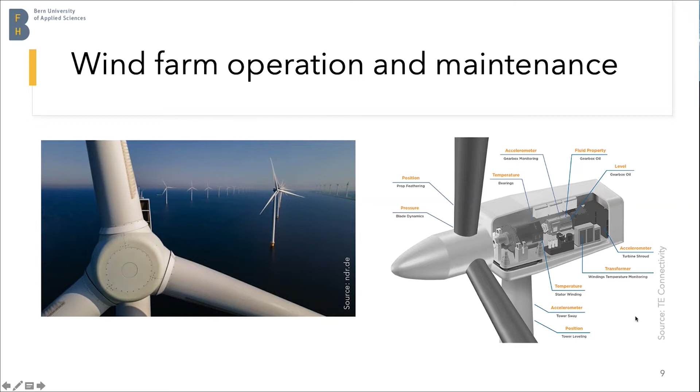Wind turbines are essentially a power plant, and this is nothing you just build and that operates for two years — it's a long process, as we saw on the map, especially the planning stage with all the feasibility studies, which takes quite some time. It's a commitment that costs a lot of money, and then there's the construction, and then from construction to decommissioning.

The lifetime of a turbine is around 25 years, and that's the time period we are interested in, that we want to monitor, and that I'm going to focus on in this presentation.

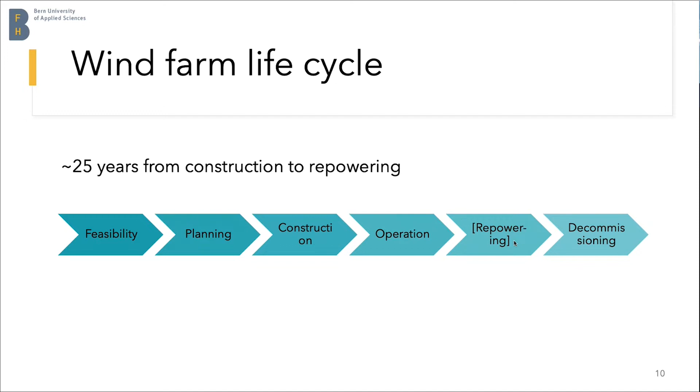So this is an overview of the life cycle cost you need to calculate if you want to build a wind farm. You have different sorts of costs — you need to pay the people who develop and manage the project, and the machines. But once everything is built and sits there, you also need to look into and maintain it, and do repairs and so on.

This operation and maintenance cost can make up to a third of the whole life cycle cost. Offshore wind turbines especially can be quite costly because they operate in very rough conditions in the open sea, and it costs a lot of money to do maintenance work there. So the idea would be that if we can reduce these operation and maintenance costs, we can have electricity that's even less expensive.

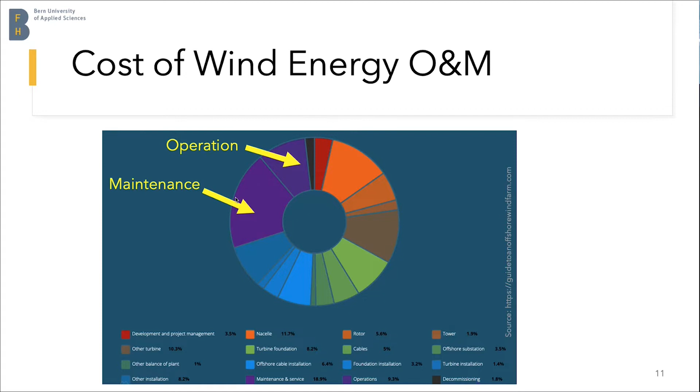So the levelized cost of energy is going to be reduced then. So that's one of the motivations why we look into PHM of wind farms.

Okay, so this is an overview of the different studies. This is one of them, where people looked into the known issues from different wind farms and different vendors. So you can see on the left-hand side the annual failure rate - how often do we see a failure in a certain subsystem. And then on the right-hand side, you see the associated downtime per failure.

So we can see that we have relatively high failure rates, for instance, in the electrical system. But when it comes to downtimes, which is probably more interesting to operators because that reduces the power they generate and directly affects their revenue and return on investment, these downtimes per failure are quite relevant. And you can see that drivetrain, gearbox, and generator components can lead to particularly long downtimes because they are difficult to replace.

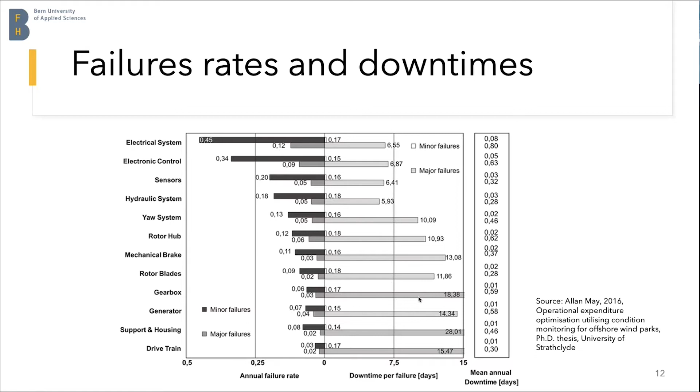So this is just an overview of different maintenance strategies, which probably in this seminar I don't need to explain so much in detail. We know that there are different perspectives or strategies when it comes to maintenance, not just in wind farms. There's the idea of scheduled maintenance - this is, in my experience having worked in industry for some years, what we still find in many, if not most, industries.

You have scheduled maintenance - for instance, you buy some sort of equipment, and you also have a service contract, and someone comes by and checks in every 2 years or 1 year. Then you have regular costs which you can plan, and you don't look into the actual condition of your engine. That's kind of like scheduled maintenance.

And then what's actually happening also in industry is condition-based maintenance - that's what we look into here in the wind turbines. We want to know 24/7 how our engine is doing, how our system is doing, what does it do. Do we need to refill the oil? Do we need to go perform any inspection, for instance? So that's the idea of condition-based maintenance - 24/7 monitoring.

I'll give you an overview of some machine learning approaches that we can use to automate this a bit more. And then there's this holy grail idea of predictive maintenance, which, in my professional experience, isn't present in industry so often yet. The idea would be that we do condition-based maintenance, but on top of that, we're able to estimate how long a certain subsystem or the whole system will live, or until maintenance is needed. This is something we see maybe more and more in batteries, but not so much yet in wind turbines in industry.

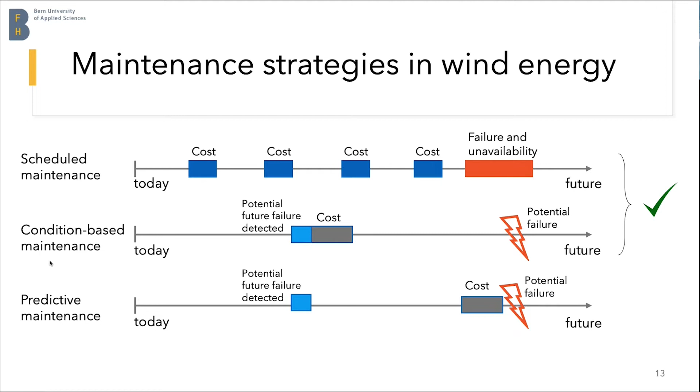Okay, good. So let's look a bit more into the different systems - I spoke briefly about this already. We have different subsystems: there's the rotor, and the blades - the blades pitch, so the position of the blades is controlled towards the wind in order to regulate the speed of the turbine. So we have a pitch system and associated monitoring of the blades and the pitch system. Then we have the drivetrain.

So we want to monitor the vibrations - accelerometers are quite important for the gearbox, but we also want to monitor, for instance, oil properties in gearbox oil. And then there's the electrical system in the generator, where we look into temperature monitoring, and discharge monitoring is also quite important there. It depends also on the type of wind turbine - whether you have one with or without a gearbox - so there are different types of generators, and associated different types of monitoring come with it.

Okay, and then on top of that, or in addition to that, we also have the data from the control systems, SCADA data - SCADA is supervisory control and data acquisition system.

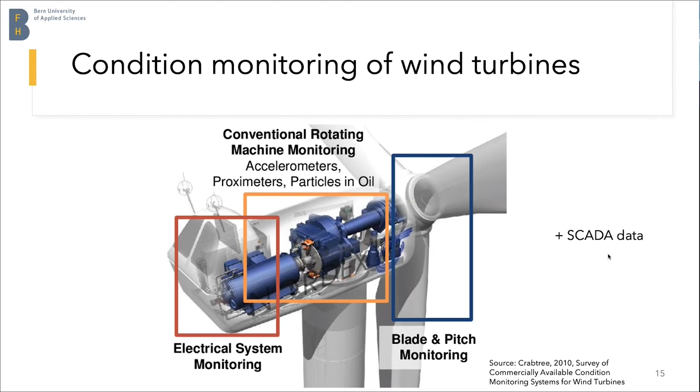Here's another list of what we have available. Like I mentioned, we have monitoring of all different aspects. We can even monitor, for instance, the motion of the tower to infer something about the structural integrity of the tower. So there are also vibration monitoring systems for towers, for instance, which is not listed here, but I have listed it here as well.

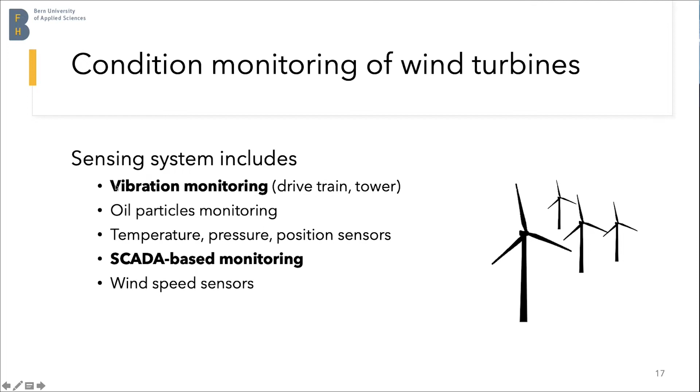In this presentation, I'm going to give some examples of vibration monitoring. I will introduce how we propose to use convolutional autoencoders to kind of monitor the normal behavior and then detect deviations based on vibration responses from components. I'm going to go into this in a couple of slides, and then also give you an overview of SCADA-based monitoring.

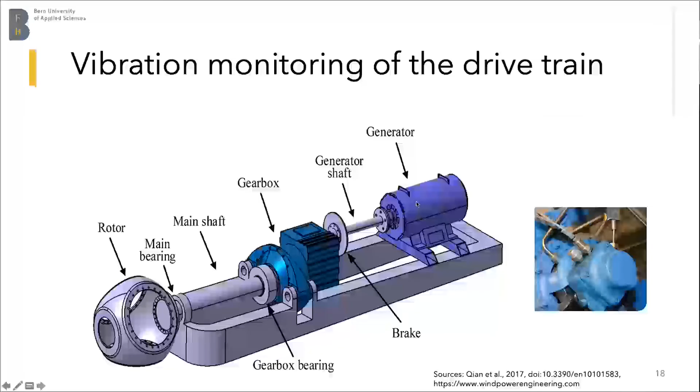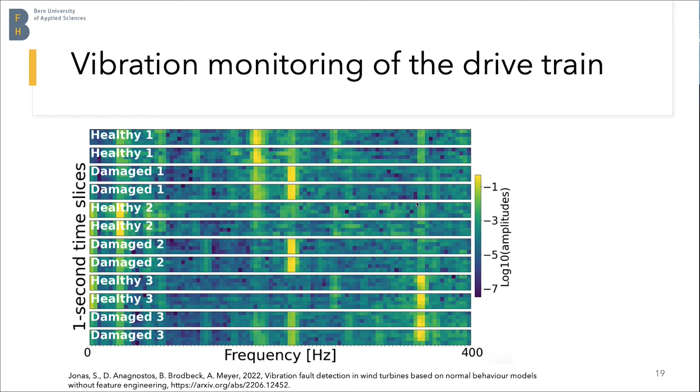Vibration monitoring of the drivetrain is one topic, but I'll go into this in more detail. So I'll jump over this slide, coming to this in a few minutes.

Then SCADA-based monitoring, how does that work? Well, as I said, the SCADA data comes from the control system of the turbine. The turbine is automatically controlled, and that system requires data about the angles, for instance, of the blades and the temperature of different components. So you have this data more or less available anyways, and you can make use of it. It comes at regular intervals every 10 minutes, and that's quite convenient to use if you want to do normal behavior modeling of wind turbines.

So what does that look like, to give you an idea of this data? SCADA data, which I'm going to speak about now, comes every 10 minutes. These would be average values, and you often also get a little bit of statistics around this: mean, then maximum, minimum, some standard deviation, over 10 minutes. You get this data as time series of several hundreds, if you want, probably even thousands of variables, depends on the manufacturer.

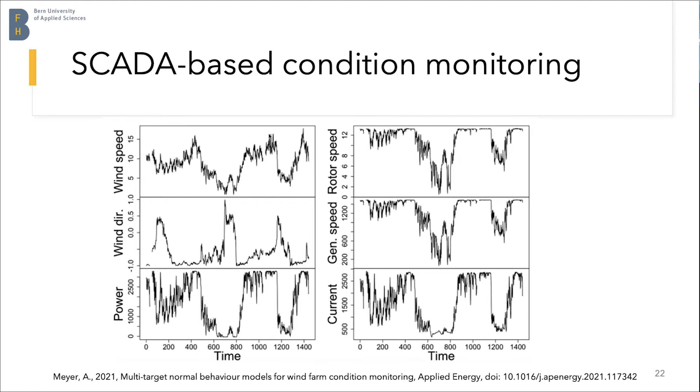Okay, so now let's give you a bit of an overview of how we can use this to construct machine learning models. This is basically regression models. You have input variables that need to be defined by you, usually variables that drive the whole process. In particular, wind speed is a good candidate if you want to model the power production of the turbine, but it depends on what you want to look into.

Variables that are also quite popular for normal condition monitoring - popular target variables would be temperatures. We want to monitor temperatures of different components, like the gearbox bearing, and all the different components where we really want to know what is the current temperature and whether that's in the range we'd expect depending on the current and past wind speeds.

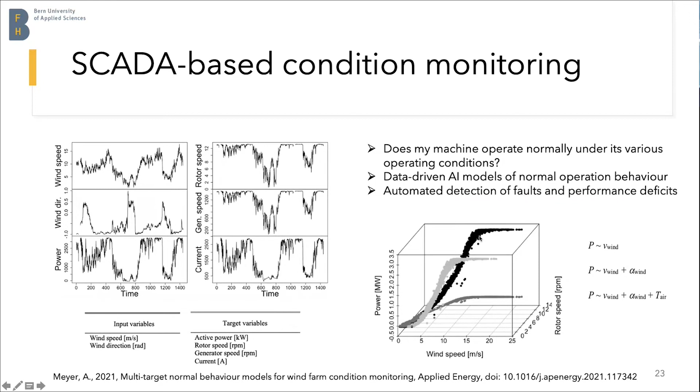Using this model, you know where you should be in your vector space, and if you're quite far away from that location, you get an idea that probably something is not as it should be. It's kind of an anomaly detection approach, because as in many industries, we don't have labels, or very rarely do. So this is mostly an unsupervised approach.

This is an example where it's in a product, like a software you can subscribe to as a service, and it's in operation, where these models have been effective in detecting maintenance needs.

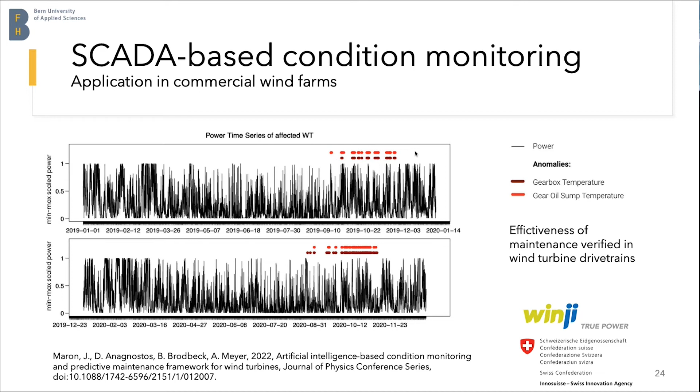Good, so let's go a bit more into challenges and opportunities. I hope I gave you a short introduction into what, from my experience, is the most popular in-practice approach to data-driven condition monitoring and fault detection. But now let's take a wider view on the question of what are challenges and opportunities in prognostic and health management of wind farms.

If we don't just think about the machine learning models, but also about the practical maintenance, then we will very quickly see that there are quite substantial challenges.

What's quite obvious is that the best locations—subtracting all the locations that are out of question because of environmental factors, ship routes, and so on—the most suitable ones were taken first: the ones in shallower waters and closer to the shore. Lots of wind farms are not so far from shore and at shallower water depths. Now the newer, future farms go into other positions, meaning they are further and further away from the shore.

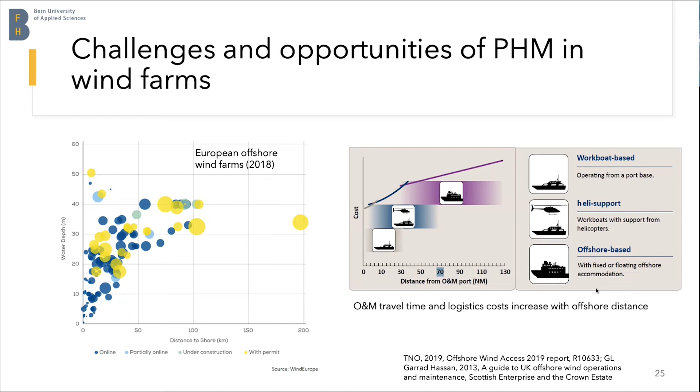Okay, then other challenges, like data, machine learning related, but also other non-machine learning related, just in more or less random order. So for the machine learning models, the big challenge, as in other industries, is to generalize those models across turbine types.

Another kind of challenge, or reality we face, is that as in most industries, we have basically no labels, no ground truth. We have the SCADA data, we have the sensor data, but then how to interpret that data — we sometimes have maintenance logs, log files, sometimes we get information by speaking with the operators, but generally we have no clean, nicely labeled data sets.

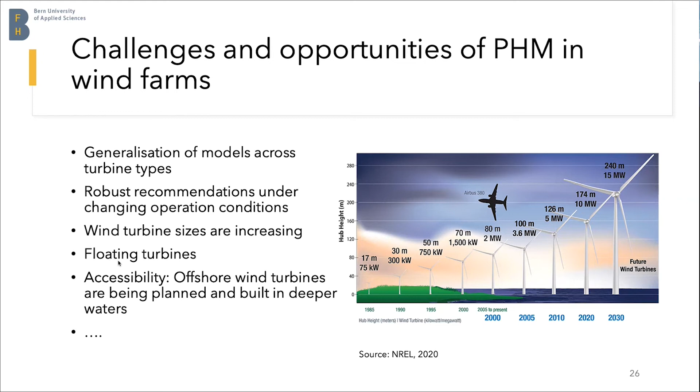Then we have also floating turbines. I'm not sure, maybe this is something new for you — offshore turbines are not just on fixed steel and concrete constructions, like fixed monopiles or tripods, but there are also floating turbines. So these also require their own maintenance concepts.

Okay, then other challenges we have: cost of data acquisition, storage, and computing time. That becomes relevant because, as I mentioned, we can have gigabytes of data from such turbines, especially if we look into accelerometer data, where we have kilohertz sampling rates, and we really need to decide how much and which parts of this data to keep and which not to keep.

Lack of sensor data for training supervised models — I mentioned this already. Related with this whole aspect is we have few fault observations. We have a diverse range of fault types, and a diverse range of models, manufacturers, and so on.

Sorry, there's a noise. Is there a question from someone? No?

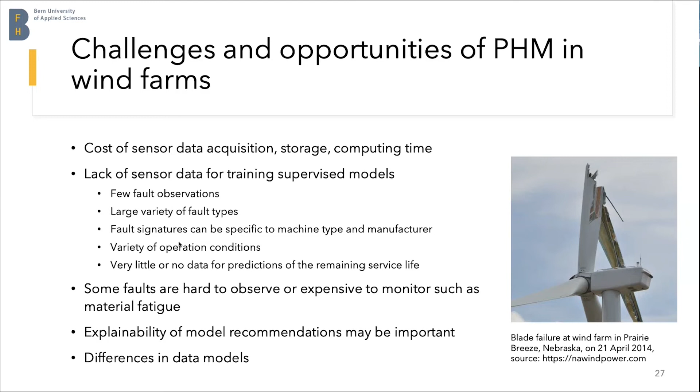Okay, good. So maybe I'll try and speed up a little bit because I also want to speak more about the research we have done — more on the opportunity side. I spoke a bit to give you an idea of what challenges there are, but then there are also, I think, quite some opportunities, apart from the fact that this is overall a very exciting research area.

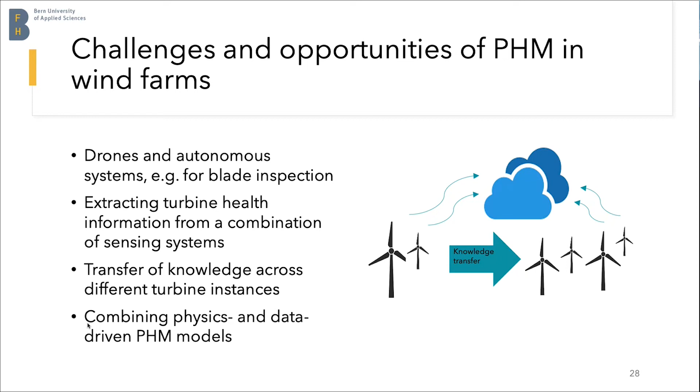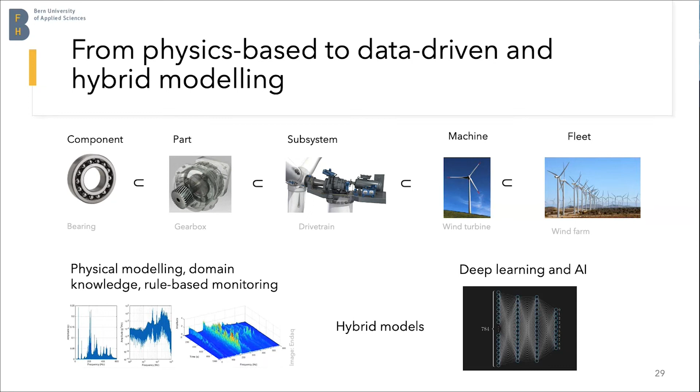Now, the next couple of slides are going to look into normal behavior models more in detail, some research that we did there. And then I'm also giving a little introduction in how we use the convolutional autoencoders. So for the rest of the talk, for the next 10, 15 minutes or so, I'm going to present some results that we have been doing in this field.

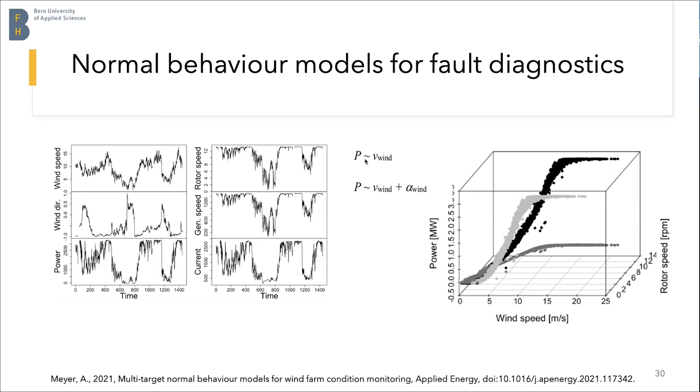So we looked into this already. Normal behavior models can be used for diagnostics, right? I presented this SCADA data to you. I also explained that you can come up with what is essentially a regression model that you can fit with an algorithm of your choice, such as a neural network. And then you have a target variable, usually one target variable, and that is the one you want to monitor. For instance, if it's the power, then you might be interested in detecting underperformance of your turbine with such a model.

And then with these variables, you can come up with what is called the normal behavior model. You model the expected behavior as you have seen it in the same or other turbines, healthy turbines in the past, under similar operating conditions. Then you can basically determine what behavior you should see, the expected behavior based on your model, given the current condition - current wind speed, current air density, air temperature - which are important also if you want to have a power production model, for instance.

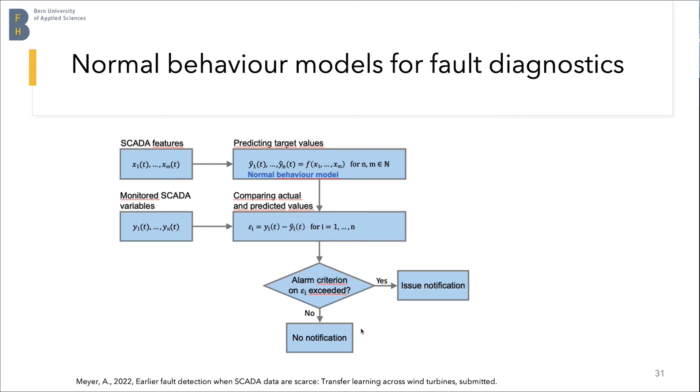Another question is, that's all we have, we have the SCADA data. What do we do with it? We have no additional information, we don't know what exactly happened. But what we can do is look at other variables, and we did this.

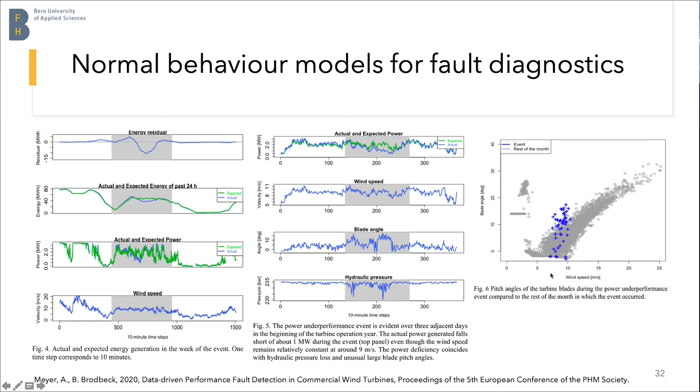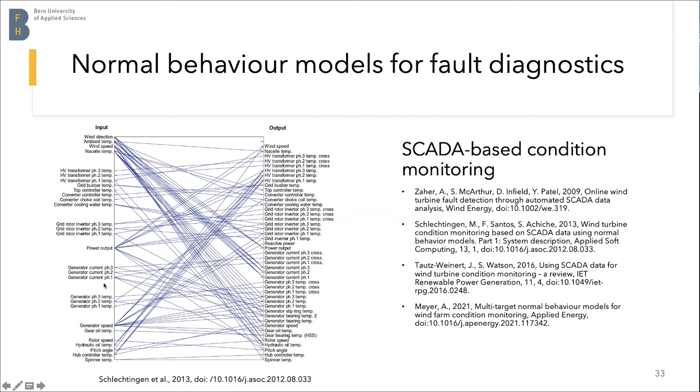Because looking at this, what is in place with many operators is lots and lots of them, hundreds and thousands of single target models. You always have a model like, I want to model power, and I do this with these input variables. I want to model the hydraulic pressure, and I do this with these inputs. I want the rotor speed, so you have lots of single target models.

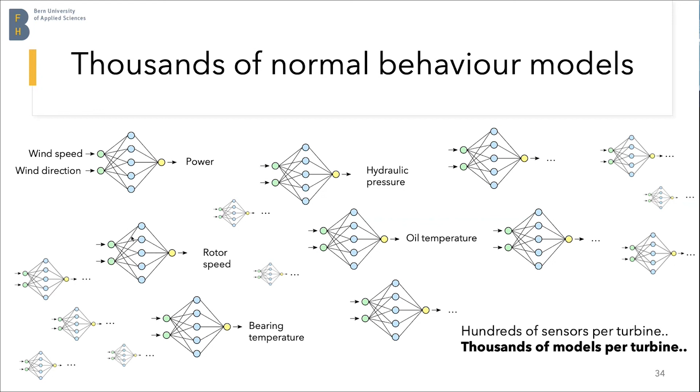So what I looked into last year was, why not have less of these models and just do multi-target models? Wouldn't we even be able to gain an increase in accuracy from the fact that these models could actually learn how the different target variables are related to each other? That was the study that is plotted here.

I showed in this study that, at least for the example I looked into, the multi-target models can obtain the same accuracy as the single target models, but you reduce the number of models, which is quite nice. And in some cases, I could even show that you get a higher accuracy.

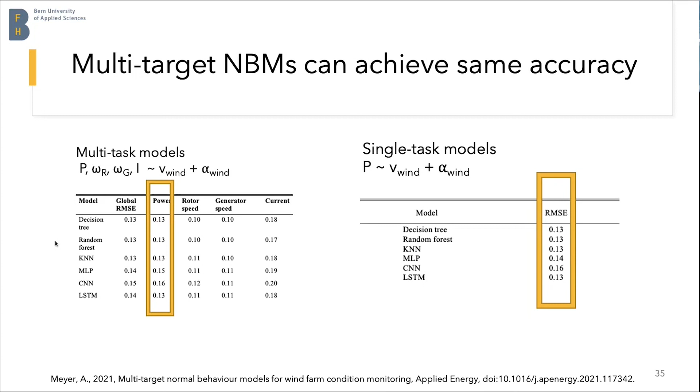Higher accuracy of such a normal behavior model is quite important, because the more accurate the model is, the clearer you will see deviations, the earlier you'll be able to trigger an alarm with your notification system. So the more sensitive you are to unusual situations, the earlier you'll be informed and able to perform or plan maintenance. So accuracy of normal behavior models is important.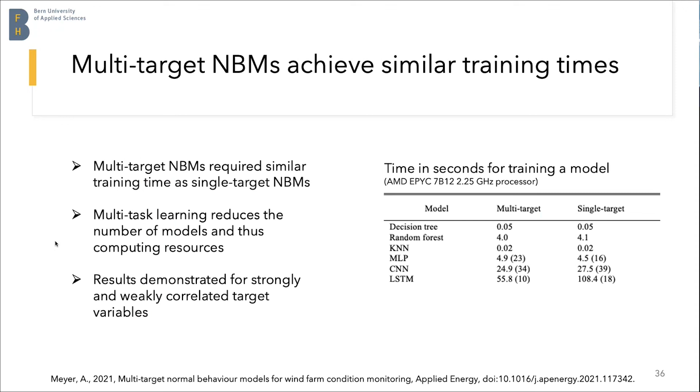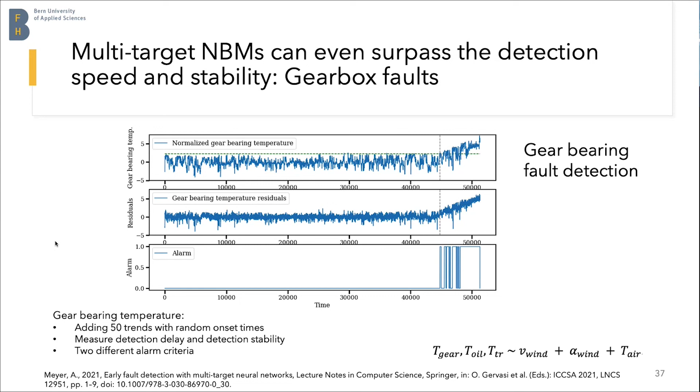This shows that in the cases we looked into, they have comparable training times. The multi-target models were not extraordinarily more expensive. And then this is a study, I won't go into detail because of time, where I showed that you can even get more accurate results with multi-target models, and you can see occurring faults earlier, which is quite relevant in practice.

Good, let's go to the next one. This is vibration monitoring, which I mentioned already, a study we did recently with two data sets: one from an operational commercial wind farm, and one from NREL, the National Renewable Energy Laboratory, an applied research organization in the US. So one was from a commercial wind farm, and the other from test bench measurements of two quite large wind turbines.

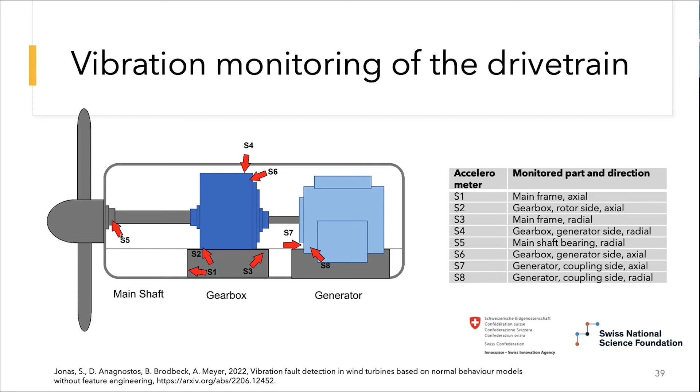This is a cross-section or sketch of a wind turbine, and you can see the positions where the accelerometers measure vibration, the acceleration, and then you can use that information and convert it into a time-frequency analysis, looking at the spectra and how they evolve over time depending on the operation conditions. These red arrows indicate the position of the components monitored by, in this case, 8 accelerometers from which we had data.

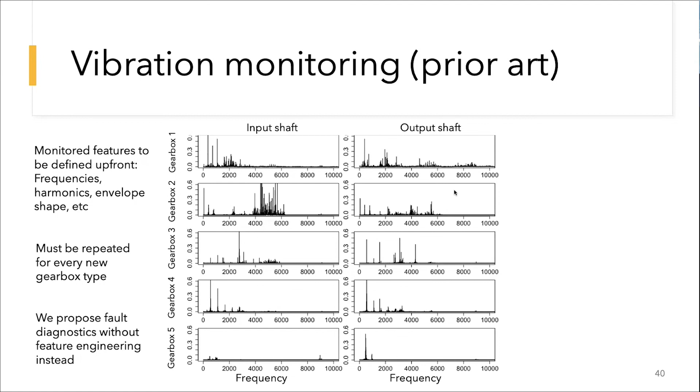There are more elaborate approaches, but what you always did so far is define the features you look at beforehand. You need quite some knowledge about what ratios of amplitudes to look at, what the envelope is like, you need to have invested quite some time defining the features to monitor once the turbine is in operation. What we proposed and demonstrated in this case study is that we don't want to define these features up front, but instead monitor the spectra and look for when the spectra change, in an automated manner.

From these 8 sensors shown by the red arrows, you can see measurements, frequency measurements up to 10000 Hertz, which is where most of the action and interesting information is in a wind turbine, because that's where lots of the characteristic frequencies are situated.

Here we compared two wind turbines, WT1 and WT2, and we compare the spectra, part of the spectrum, the first 1000 Hertz, for these two sensors. The two wind turbines are identical in construction, same exact model, setup, and design. The only thing we knew was that one had a fault in one of the monitored components, and the other did not. So this is the first wind turbine, sensor 1, and the second wind turbine, sensor 1, and you can visually compare the spectra. Now you can do this also for the second sensor, the third sensor, and so on.

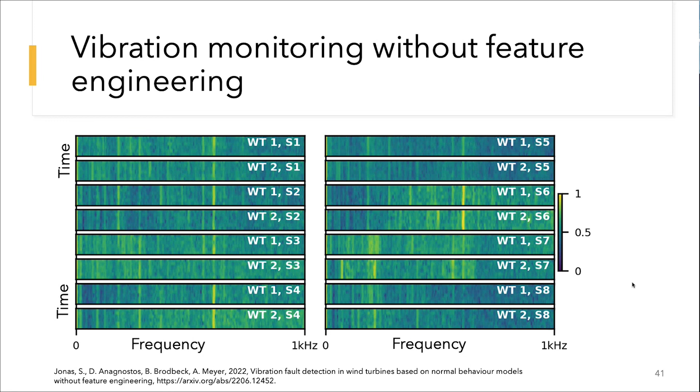And then you do this over time, and at some point you notice one of the spectra changes. So what did we do to automate this? Well, we took the vibration measurements and constructed... let me try to wrap up in a couple of minutes.

From the vibration measurements you construct spectrograms, and you can treat them as images. You put them into a convolutional autoencoder, which is like shrinking, compressing—basically a compression algorithm. It compresses and maintains only the most relevant information.

Then it's trained to reconstruct the image. We have the reconstructed spectrograms, and we compare the actual spectrograms with the reconstructed ones—the difference is similar to what I've shown before. This residual, when we're not able to reconstruct the spectrogram nicely, is an indicator that something has changed in the spectrum. So what does this look like?

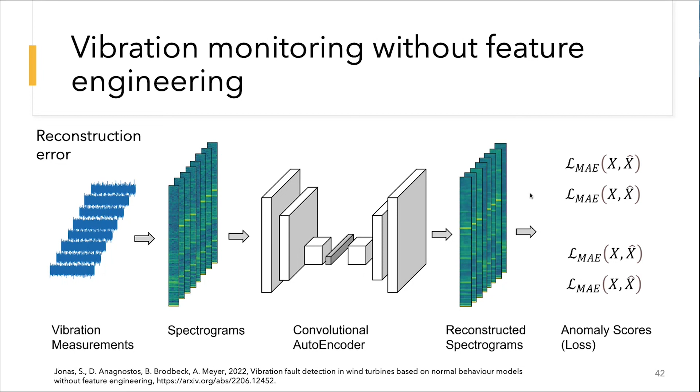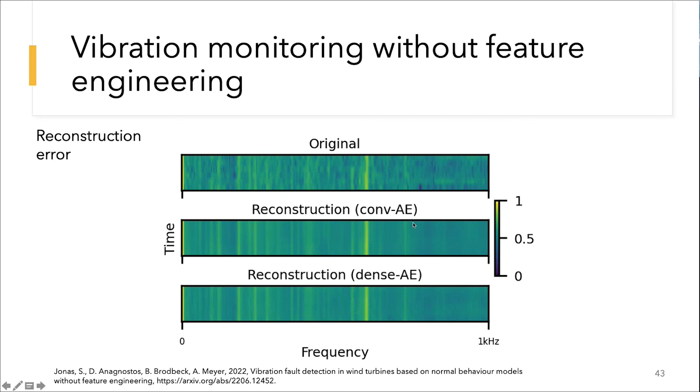This is the original, one example of an original spectrogram, and here's the reconstruction with the convolutional autoencoder, and this is with another, a dense autoencoder.

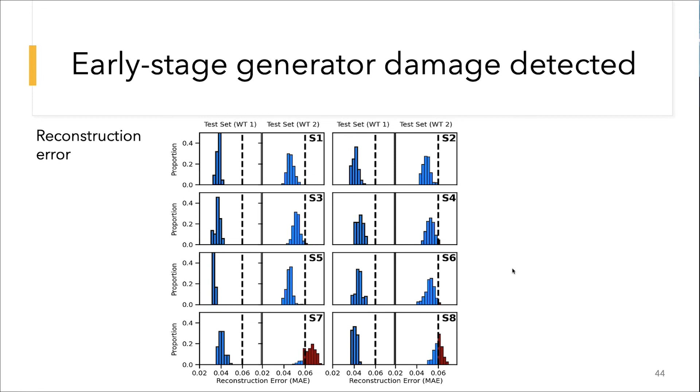Again, this is an unsupervised approach, so we can only say this is an unusually large reconstruction error. We can also illustrate what this looks like over time—this is the reconstruction loss over time, and we see episodes where it's much larger than for the other sensors.

I should mention it's important to always take these spectral measurements at the same rotor speed—this is kind of triggered. All these measurements were taken at the same rotor speed, to make sure you always measure under the same conditions.

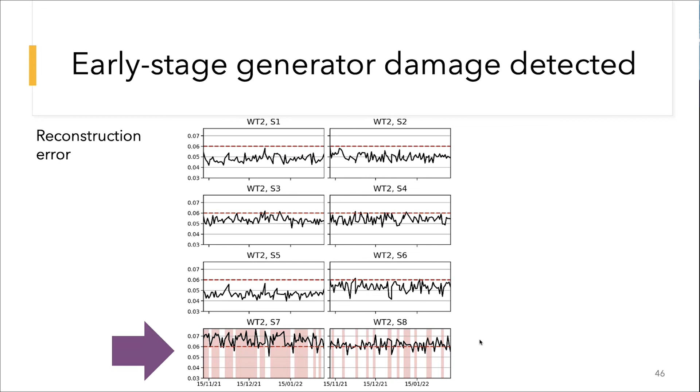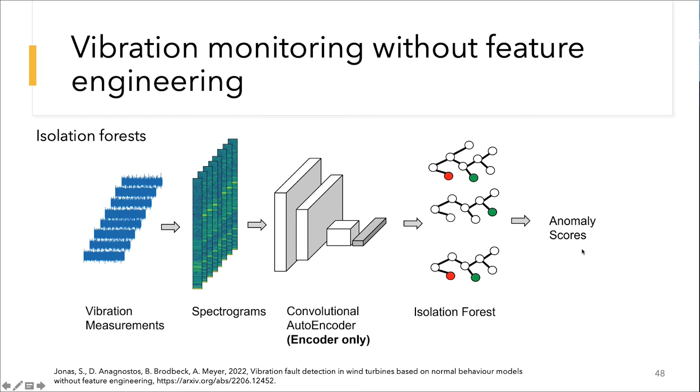The last thing to mention is we also compared this with another approach using isolation forest. We used only the first part of the autoencoder to compress these images, then used isolation forest, an outlier detection approach, to construct anomaly scores. This is a visualization histogram of these scores, and you can see it's relatively consistent—again, sensors 7 and 8 stand out.

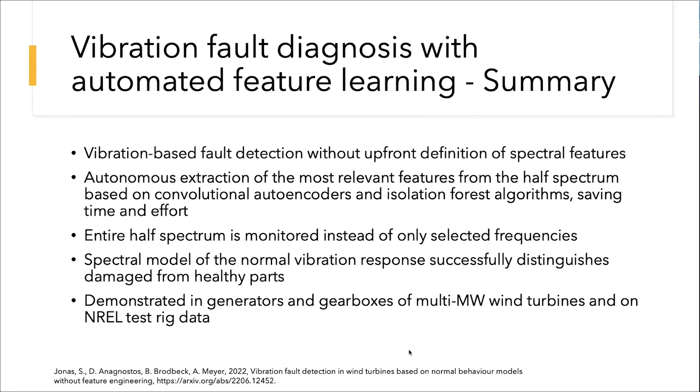I'll jump over the summary and briefly touch on a last aspect we're currently working on and have already submitted some work on: we're exploring the potential of transfer learning approaches, for instance to enable earlier detection of operation faults.

The idea is that you have access to nice data sets from several wind turbines, but maybe also other wind turbines where you have less data, or fewer observations of faults—scarce data for these other turbines. The idea is to use the knowledge gained from these source wind turbines, and transfer it to enrich the scarce data in the target wind turbines.

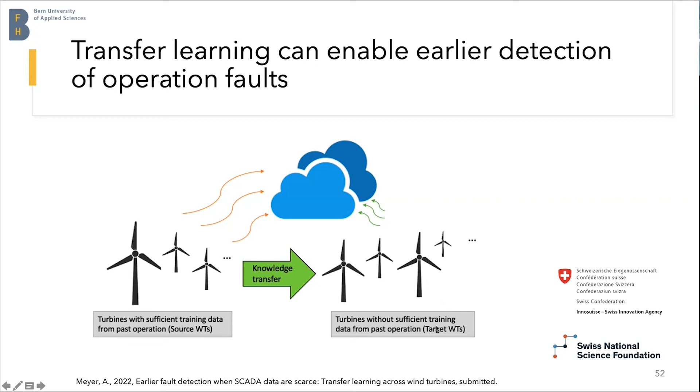This is a current research project and we see quite nice results. We're comparing different transfer learning strategies, and some of them are more beneficial than others, leading to earlier detection of faults.